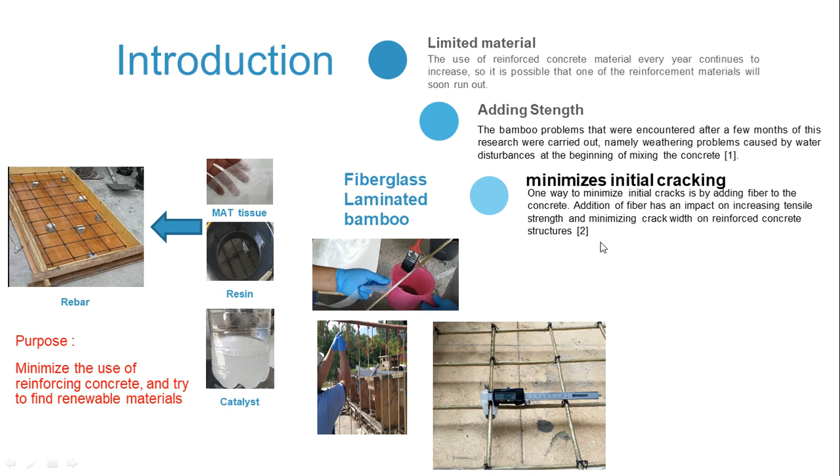So the bamboo is coated using the fiberglass. After that, to minimize the occurrence of initial crack openings in the concrete, since we know concrete has weak tensile strength, we also add flexible fibers, one of which is polypropylene. So to minimize initial cracking we use polypropylene fibers, made from virgin polypropylene.

For the polypropylene fibers, we follow the manufacturer's standard of 600 grams per cubic meter, equivalent to 0.025% by weight of concrete and reinforced concrete, and a maximum of 900 grams per cubic meter, equivalent to 0.0375% by weight of reinforced concrete.

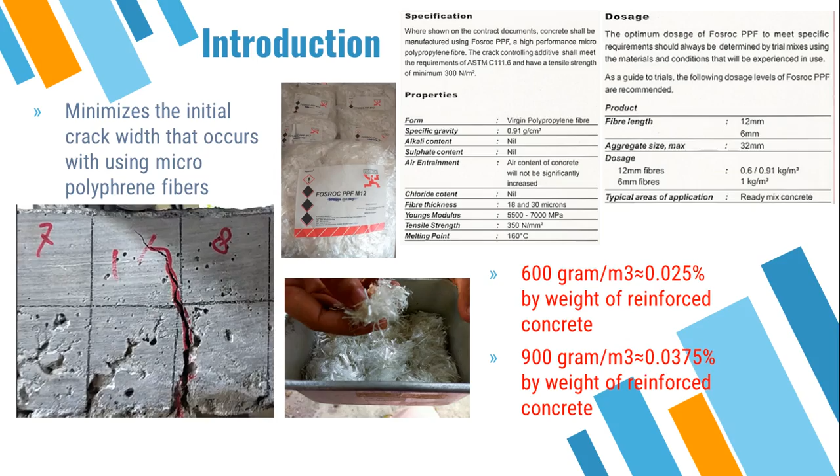For the bamboo, we use a comparison: bamboo without a layer with a diameter of 8 mm, steel reinforcement with a diameter of 8 mm, and bamboo with a diameter of 6 mm coated 2 millimeters thick, resulting in 8 millimeters with the fiberglass. After the reinforcement is assembled with the formwork, be it steel, bamboo, or bamboo covered with fiber, the concrete is mixed, either without fiber or with fiber.

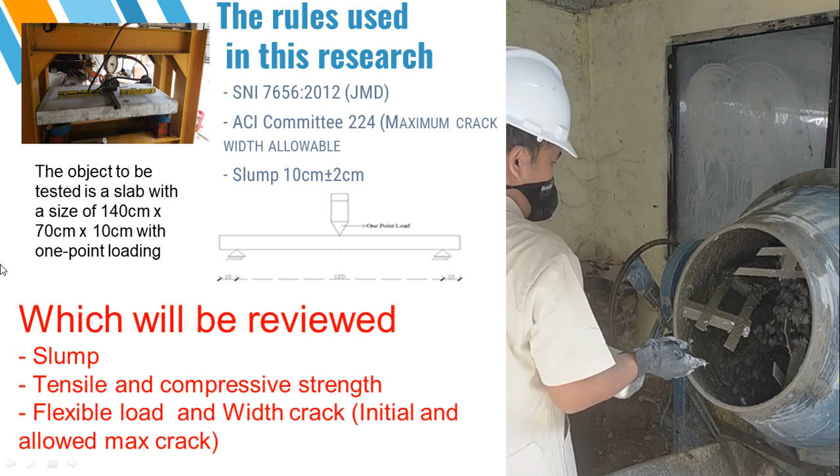From the concrete mixture we review slump, tensile and compressive strength, flexural load and crack widths, initial and maximum allowable cracks. For flexural load and crack width, the test object is a slab 140 centimeters long, 70 centimeters wide, and 10 centimeters thick, using one-point loading. The rules used are SNI and ACI committee for maximum allowable crack width, and a planned slump of 10 centimeters plus or minus 2 centimeters.

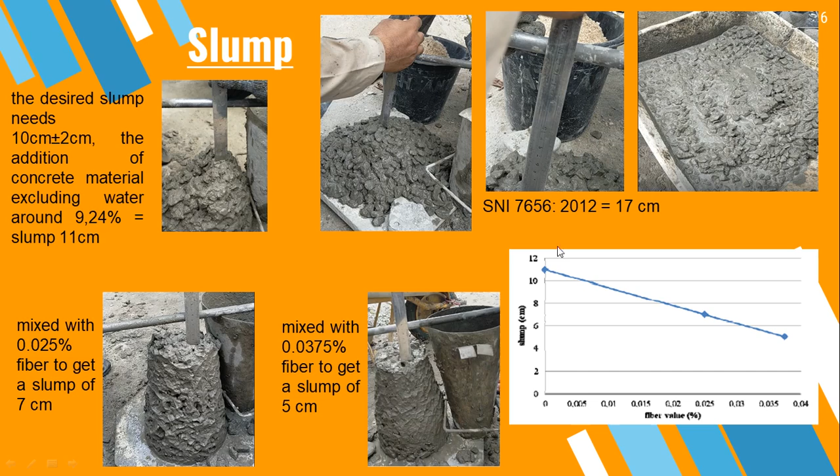For the slump, we got the desired result. The desired slump is 10 centimeters plus or minus 2, and we got 11 centimeters. After mixing with 0.025% fiber we got a slump of 7 centimeters, and with 0.0375% fiber a slump of 5 centimeters. So compared to the initial slump, the final slump decreased.

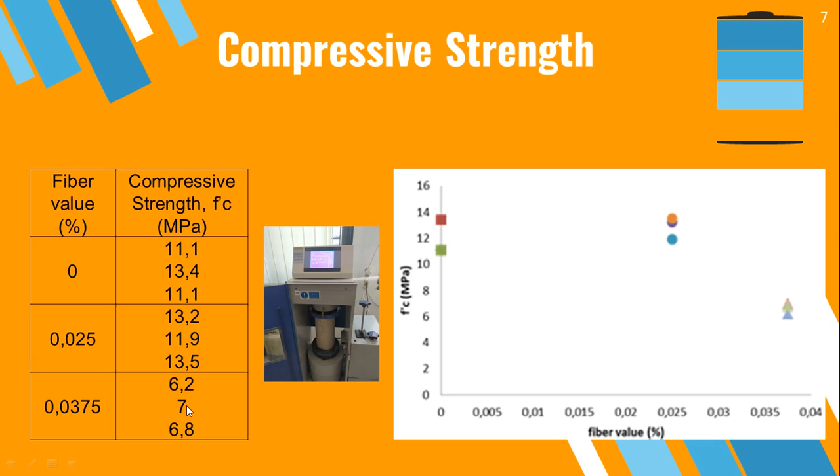For compressive strength, both compressive and tensile strength decreased after adding fibers. Looking at the compressive strength graph, with 0% fiber we get an average compressive strength of about 12 MPa, with 0.025% fiber an average of about 12, the same as the initial compressive strength, and finally with 0.0375% fiber the value decreased to an average of about 6.5.

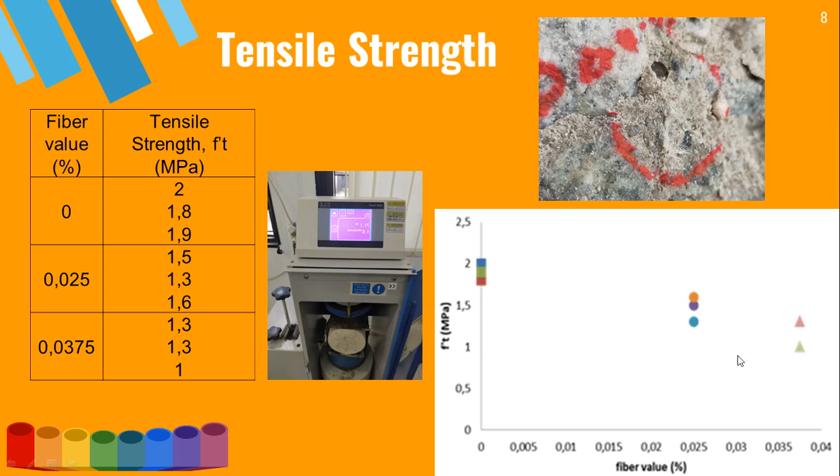For tensile strength, we also get a decreased value. After adding fiber, the tensile strength decreased, as we can see in the tensile strength graph.

For the flexural slab test, we get the initial crack width and loads from the bending test on a plate 140 centimeters long, 70 centimeters wide and 10 centimeters thick. From the bending test results, something interesting was found: bamboo coated with fiber gets large initial cracks at a large load.

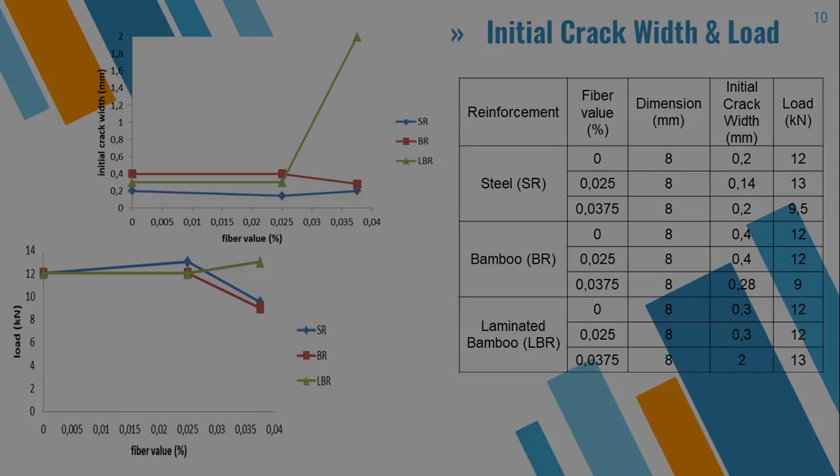Bamboo coated with fiber gets large initial cracks with a large load, and small average initial cracks with a large load are also found in the steel reinforcement, although not far from the other averages. For maximum crack width and load, there has not been an increase.

In conclusion, first, fiberglass lamination given to bamboo has a good impact, as seen by the increase in the flexural test results on the slab. Second, the addition of micropolypropylene fibers to overcome crack width has not had a large impact. Third, one reason the fiber has not yet shown results in overcoming crack widths could be the drop in compressive strength. This could be studied in further research.